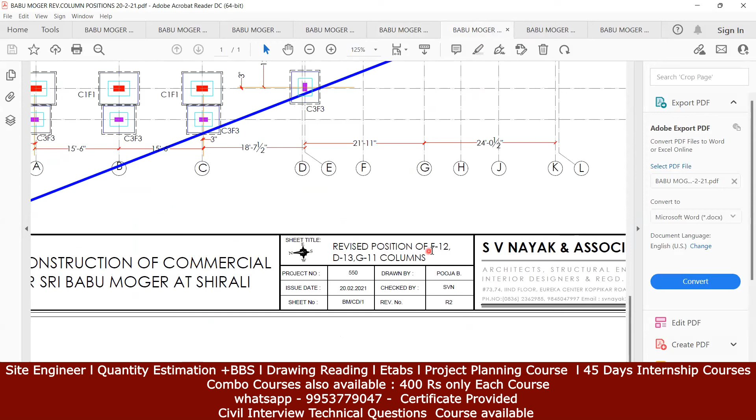They have written revised position of F12, D13 and G11 columns. They are going to write what all revision has happened there. And again this is R2 revision, and then you come here.

So this is R3 - again revised position of the column near the well. Near the well there was some revision here. So well is somewhere here, we'll see where the well is. Yeah, so the well was somewhere here, so here they have done some revision, I guess. So this is another revision what they do.

And then finally there's one more revision which has happened. This is R3 only. You can see the difference - in this part there are no columns at all, whereas here you can see a lot of columns has been added. So actually why has this been added?

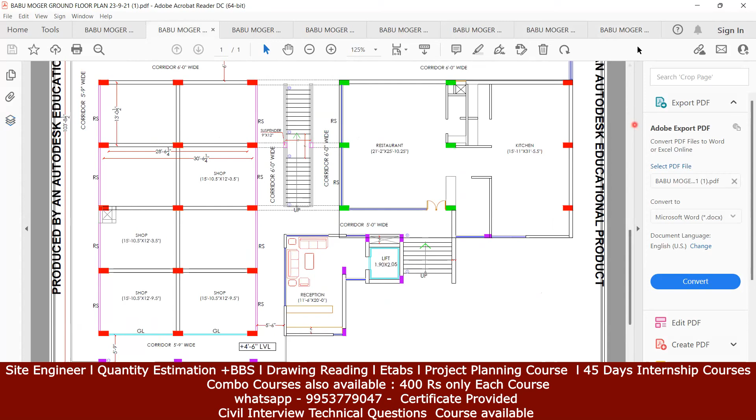Because initially if you look into the plan, we had a lift here. So you can see column 1, column 2 and column 3. For this they have not given the foundation. So here you can see there is no foundation given. So that is why he has added a foundation here and given it here.

So this is center line, of course this is a center line drawing what we're able to see. It's written here grid M, N, O, P and Q are added. Where is M, N? Yeah, M, N, O and P, Q. So maybe this is P and this is Q.

This much portion is added, that is 4 numbers of C3 column added - 1, 2, 3 and this one are added. Dimensions are highlighted, you can see this is highlighted. Rest all are in black color, whereas these 1, 2, 3, 4 columns are highlighted. So that is how usually the revision keeps on happening.

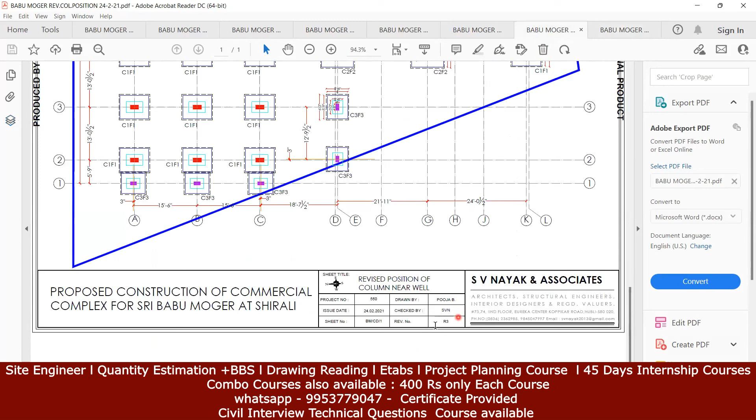So now your question is which one we should refer? Of course, the latest revision which has happened is the R3 revision. This is called a superseded drawing. So I'll write it here - these two drawings, R1 and R2, you're not going to use.

So as a site engineer or as a quality control engineer, what we do on the site is that when such revisions happen, we'll strike out this drawing in this way. We'll strike out and write it here as superseded. We'll write it here in this way on this drawing, usually we have to write it in this way only.

I'll write it here, so the QC will write it as supersede - S-U-P-E-R, S-E-D-E. Okay, supersede. Let me write it in text: Supersede. So we'll write it here, and this drawing we are going to maintain in a different file.

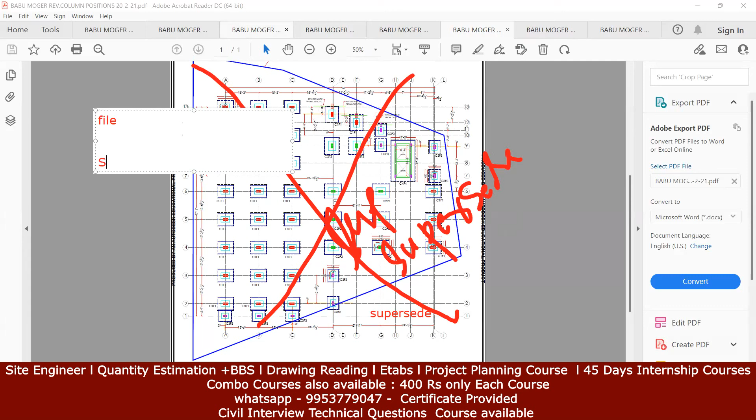When you work on the site, whatever drawings we are getting, we have to put it in the file. When you work as a site engineer, you'll be having a separate file of the drawings. The QC engineer will be maintaining one more file which is called a superseded file. So in these files, whatever drawing revisions have happened - right now we have to refer R3 drawing - the R1 and R2 revisions, whatever are the superseded drawings, are going to be maintained in this particular file. So all this documentation we are supposed to follow on the site.

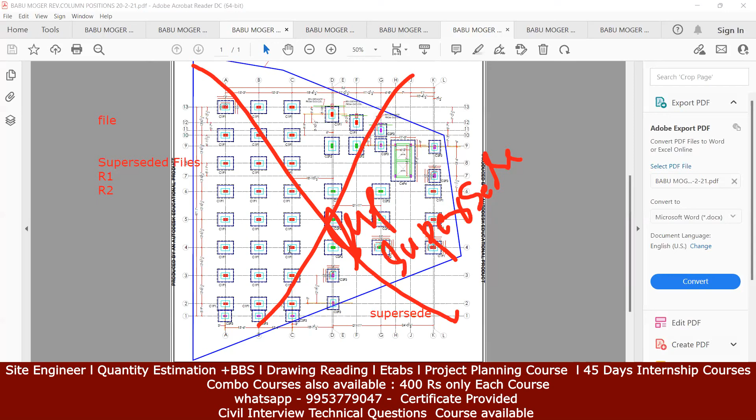So if tomorrow something happens, we have documentation with us so we can fight for that. If something goes wrong and people try to blame you, then you have all these files with you so that you can show it as proof.

So that is what usually we do at the site. Again you can see it here. Right now we have to refer this R3 revision, and this is the one we are looking at now.

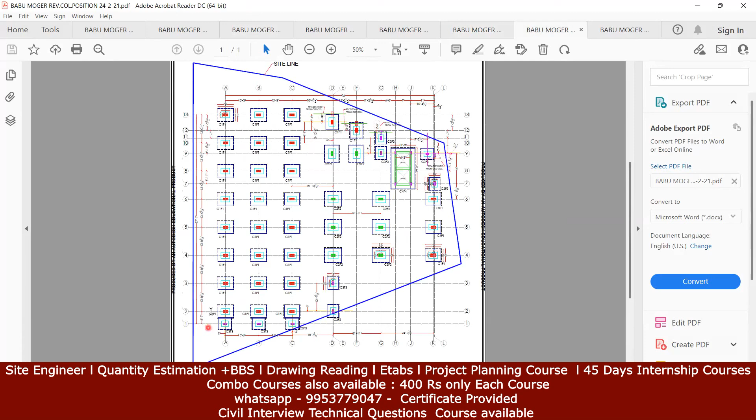Okay, now check here how all these things are given. We'll start from here. Again, we know A, B, C, D, E, F, all these are the grid lines, and 1, 2, 3, 4 are the grid lines.

Basic understanding we have. You can see here he has given the name C1 F1. All these red color columns have been given the name C1 F1. Then the green color has been given the name C2 F2. Got it? And then I can call this the magenta color - they've given it the name C3 F3.

And then for this, this is a staircase portion, right? It's not the staircase portion. This is your cutout portion. Here he has given the name C4 F4 footing. All these are your C4 F4 footing. And then after that, all 4 are done.

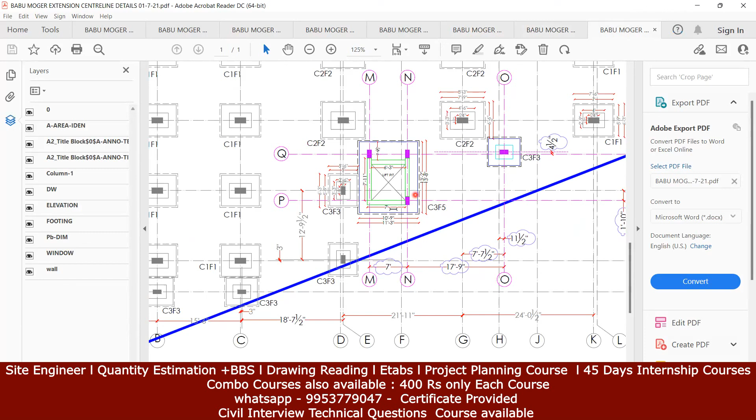So if I go to this particular footing, he has given this as C3 F5. For this, he has given the name C3 F5 footing for this entire lift portion. You are going to put all three columns, you are going to do the casting at once. It will be a kind of mat foundation here.

It is C3 F5, right? So I hope up to here your concepts are clear. So he has given the name C4 F4, and this is C4... C3 F5. This is C4 F4. Okay, this is C3 F3 as given, C1 F1 and C2 F2. Got it.

So C1 F1 is one kind of footing. Then we have C2 F2, another kind of footing. Then we have C3 F3, and then C4 F4, and then C3 F5. So these are the total 5 kinds of footing we have, and accordingly you're going to get all the reinforcement details for this particular building.

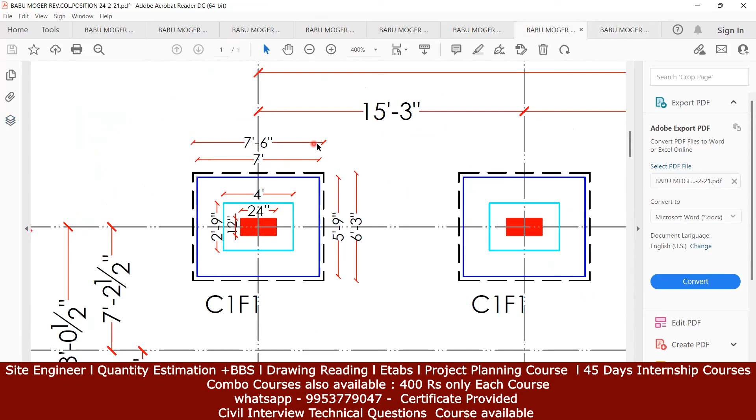Again, to check the dimension, like I mentioned, they'll give it for one particular footing. If I want for C1 F1, he has given it here. You can check it out here. See the size is 7 feet 6 inch by 6 feet 3 inch - this is the excavation level. Then 7 feet by 5 feet 9 inch is the size of your first footing step. So 4 feet by 2 feet 9 inch, this is your second step. This is a step footing, and of course the column is 12 inch by 24 inch.

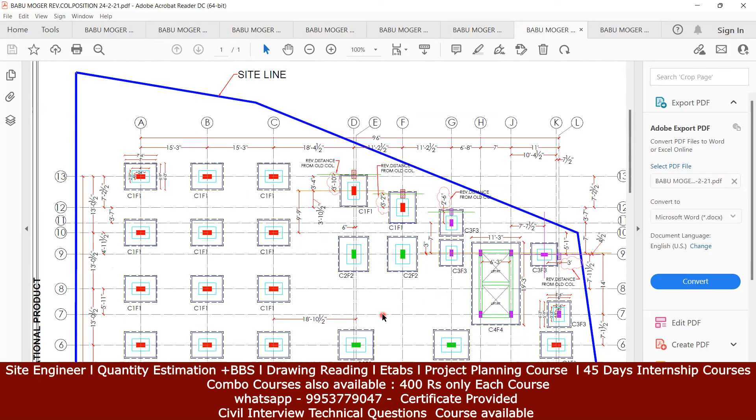Similarly, if you come to the other footing C2 F2, now check for the C2 F2. We have given it here - see here, this is C2 F2. Again it's the same thing, 8 feet 3 inch by 7 feet, then this is 7 feet 9 inch by 6 feet 6 inch, so 4 feet 6 inch by 3 feet 3 inch. This is the second step, and this is a column which is 12 inch by 24 inch.

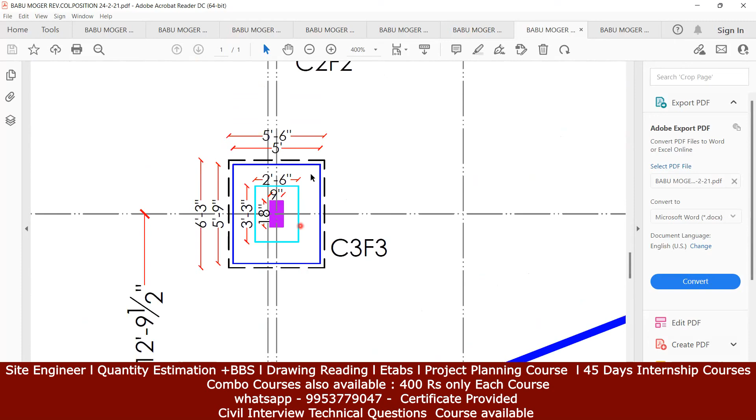Got it? Again, for the C3 F3, try to understand yourself. Okay, try to understand here. And then for the last one, C4 F4 - I think it's difficult - it is given here, it is 11 feet 3 inch by 19 feet 3 inch.

The other thing you cannot see it here. For that, you are going to refer to the cross section part, and we'll see the cross section part in the next lecture, how the cross section for this entire building is given.

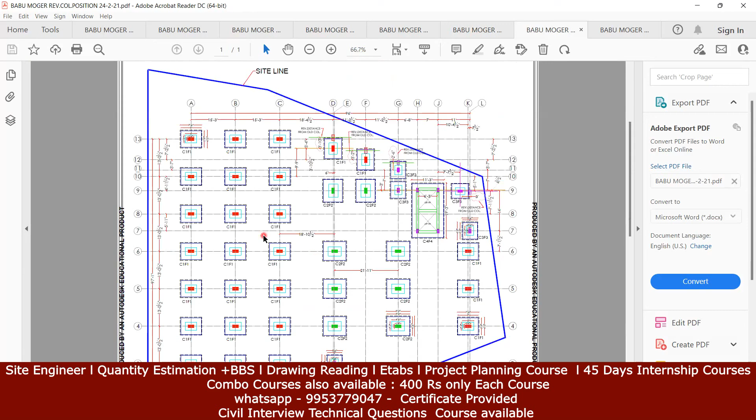Right now we understood how the location of the footing is done, and everywhere it is isolated footing. Only in this portion they have put a combined footing, or I can call it a mat. And also in this lift portion we have a kind of mat footing. So I hope up to here your concepts are clear.

We were able to understand something new called as superseded drawings, and we have understood all those things. So we'll see you back in the next lecture.